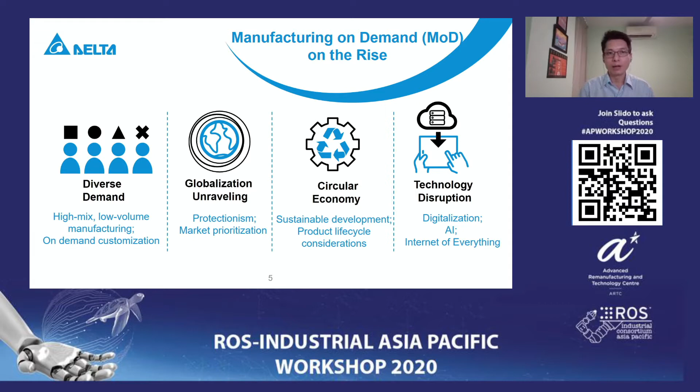Next slide. So first of all, let's take the conventional production line. When it's set up for automation, we see machines introduced in a well-designed manner based on the product. For example, manufacturing a single electronic device, like a mobile phone or laptop, involves multiple steps, perhaps 50 to 150 steps of processing.

So we have different types of machines put in place, and the whole production line, because to optimize production, we have to figure out the reconfiguration and the best optimized layout. When the whole line is set up, the cost will definitely be very high, because you also need to include calibration and maintenance.

And once the product is being produced, most of the time we do not touch the production line. But once we have a high variety of products being manufactured and the product life cycle is shortened, the production line needs to reconfigure or change quickly.

So over the whole life cycle of the machine, during line changeover, the method used is to move out machines that are not being used and add on or replace them with other machines. So machine or automation becomes even higher cost when we have a lot of line changing.

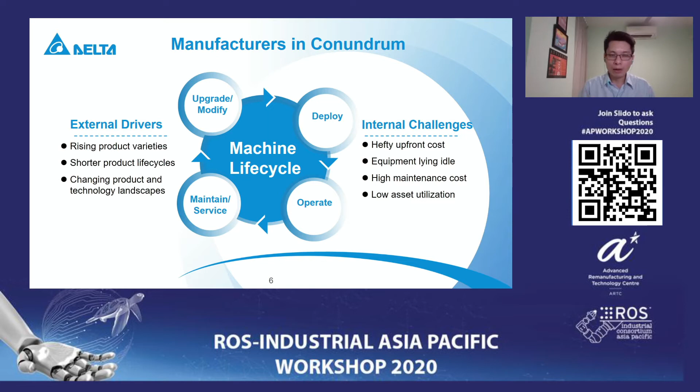So how do we do that? Here I'd like to share with you more about how we build up our transformable intelligent machine to address that. We started off with the electronic assembly process.

And once that's done, you also need soldering, which can be laser soldering or tip-based soldering. Once you complete the PCB board, you put it in a case—different types of cases—and that is the assembly process where you encase it, then glue it up by dispensing glue around it, encase it further, and then complete the screw driving process.

In between these steps, you also add automated optical inspection, AOI, for quality assurance—perhaps before or after insertion, or after soldering or after assembly—to make sure the quality is up to standard.

So for each product, the arrangement of these different types of machines will be different, because the design of the product varies—perhaps one has 6 screws to be driven in, another has 24. So how do you optimize the production line with different machines? For example, product A may need 5 screw driving steps and 2 laser soldering steps, but product B needs the opposite because of the different design.

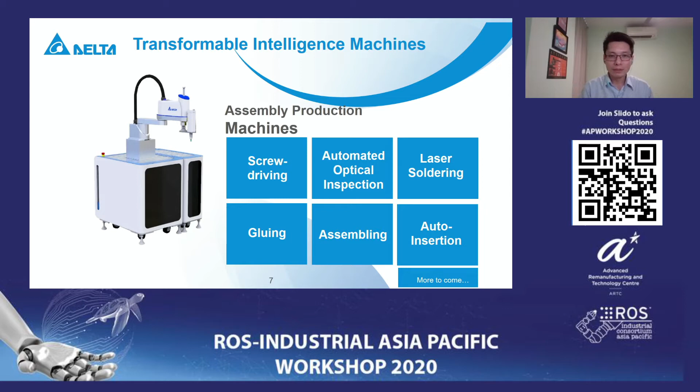But how do we have all these machines able to switch and change from one form to another? Let me share further with you.

Next slide. So the key component for this transformable intelligent machine is the intelligent part—the software, the programming, the data implementation—that helps us change the format of the machine as well as optimize performance, because you have data collected, you analyze it, and you know the best parameters to run for different products and processes.

And each part is modularized—the software and hardware components are modularized so the key system units can be reused across all the machines mentioned. We standardize all the interfaces between different components and parts so we can quickly mix, match, and fix them up, configure it, optimize it, and run it, so the changeover time will be very short.

So put together all this, what we do see next will be a TIM machine that has a modularized, standardized design, wanting to facilitate the changeover of new processes in the production line much faster. Here you see a photo of a screw driving machine, and it has all the key features needed for on-demand line reconstruction and construction, including all the related software.

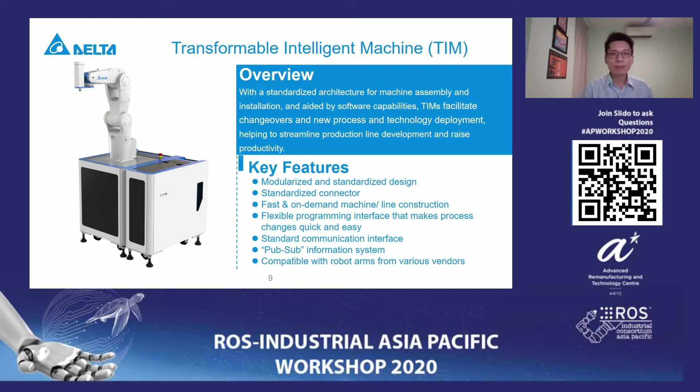So let me delve deeper into this. Let's go deeper in the next slide. So the key components of this will definitely break into three areas.

What you see in this first part is the robot arm. It can be an articulated robot arm or a SCARA robot arm, and it can be from different brands. The end effectors that we have established today are for electronic assembly, so you see screw driving, gluing, gripper, camera, laser soldering, along with this functional performance.

The second component is the common part that will be reused, being used as a standard frame and electrical control box. This will be a modular design, and moreover lightweight, to make the reconfigurable line change easy.

And we have the third component, which is the PC-based control system where we set up drag and drop graphic control, compatible with different robot controllers and end effectors. To set up the whole system, run it, and test it, we also have different types of data management, and it is evolvable, adding on along the way.

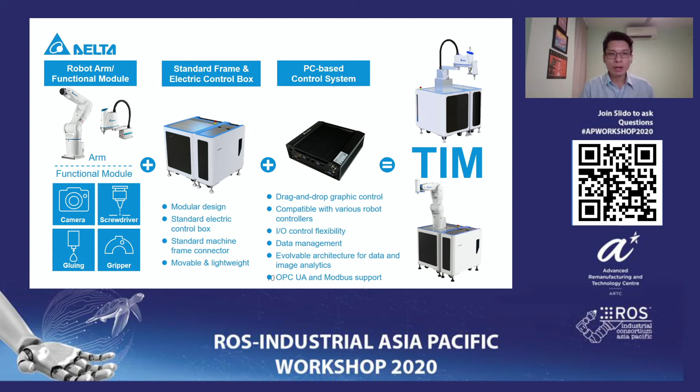So this is the idea of this TIM with these three major components. Let me go into a few examples of how we built it. Let's go into the next slide.

In terms of a screw driving TIM, the arm used here can be a SCARA or a 6-axis robot arm. Either one will be able to perform the function we need for screw driving. Depending on the product you want to manufacture, you might need the 6-axis because of different angles; otherwise, if it's from the top, you will use the SCARA.

The screw driving module end effector is the Delta product. We have the standardized frame and e-box that we use, and we put in the camera and PC control system. Once it is set up, the whole TIM will function as a screw driving machine.

And when we do need an automated optical inspection machine, we can use the common parts of this to transform it to the other function. So, next slide.

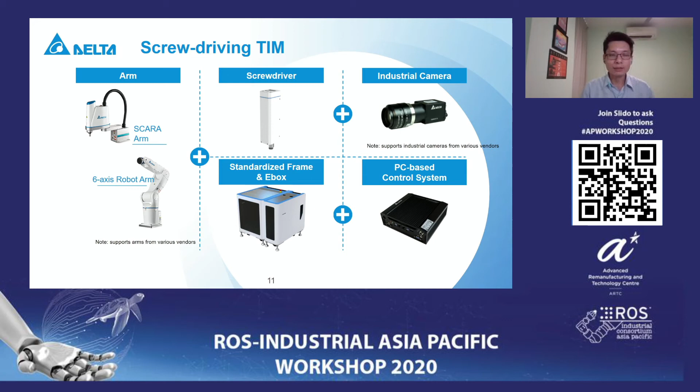Keeping the robot arm, standardized frame and e-box, and PC-based control system, the additional replacement is that the end effector, screw driving, will be changed to the optical module industrial camera. So physically, you only need to change the end effector for the function, not the whole system level.

Also, a lot of integration of the full system is done by system integrators, and to guarantee full functionality and performance, many times a replacement or change of the end effector is not encouraged. Even where this is done, it takes a longer time to tune and reprogram. However, using our method here, we can change it much faster, as well as deploy new intelligent modules.

So for the AOI, we also have the DIVA module, which is a Delta Intelligent Video Analytics module, based on deep learning. It can perform auto defect classification for various electronic products. Moving forward, it can be trained and used for other types of products as well.

If you are keen to look at it, the machine learning AI component implemented in the machine itself enables this fast changing of the module with the programming and intelligence needed. In other words, a screwdriving machine can be transformed into an AOI machine, with both the physical side and the programming and intelligence being done rapidly. Okay, so next slide.

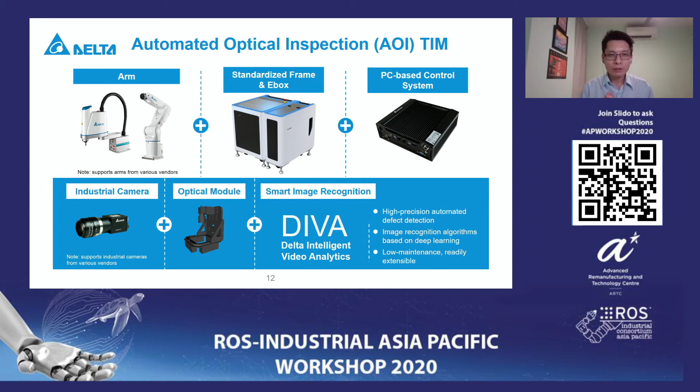So what we expect by doing this is to make the reconfigurability of machines in the production line agile, with fast changeover, and to lower the technical barrier. As I mentioned, the programming is usually done by system integrators, but with our platform there will be a library made available, and we also welcome system integrators to add library component modules, which we can share with one another.

And also for the third part of it, not only from a single machine, because the utilization for different types of processing will be shared out, the data collected allows us to perform analytics at the system level, and extracting it up at the production line level, making full production line analytics that are able to optimize for quality and productivity. So this is the expected benefit of using the Transformable intelligent machine.

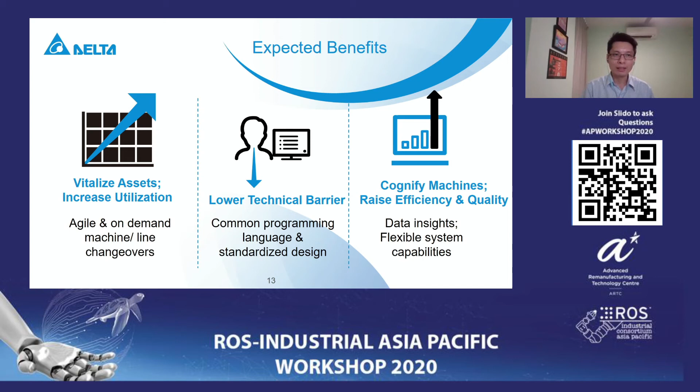One of the focus parts we are looking at is the standard machine frame. Within this, we are also very thankful for ROS, which we use in this control system and add on some functionality. Moving forward, we also welcome different partners to expand the multi-brand compatibility, so we can interface with different brands, whether it's the end effector or other types of robot arms.

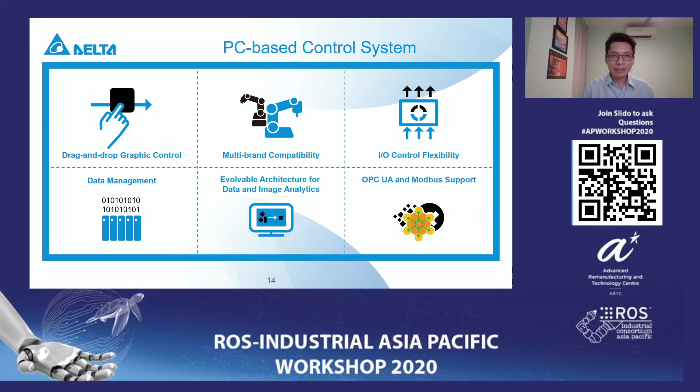So with all these, we are expecting evolvable models of the data and other types of analytics. Here we've mentioned more on the image side. So, the standard machine frame - next slide.

We are open to partners who are keen to utilize the standardized machine frame to speed up and allow reconfigurability. This standard machine frame, with the one connector we provide, makes it easy to connect machine to machine, between machines or inside one machine. The one connector provides not only the power line, but the comms line, air and vacuum - all necessary connections - standardizing it and making sure it easily interfaces with one another. So with this standard machine frame, robot machine frame and functional machine frame, it becomes the base.

You can use it with the programming inside the PC control box, put in different robot arms and end effectors, perhaps to look into different applications in other segments, not only electronic assembly. So this is one we welcome partners to discuss with us.

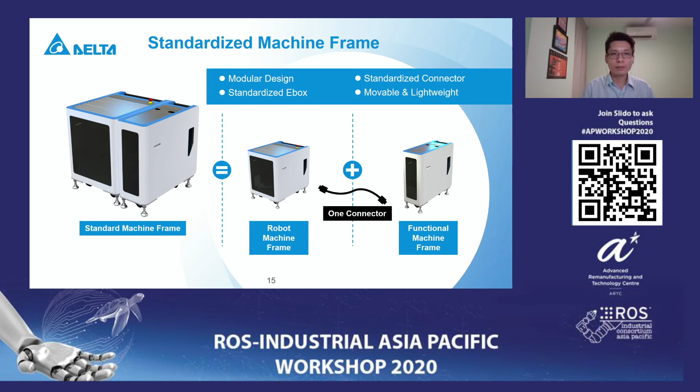Moving forward, we also have in progress work using ROS support to build different types of functions, from digital twin simulation, big data analytics, machine vision, to safety purposes. All of these are currently made available in some of our beta versions.

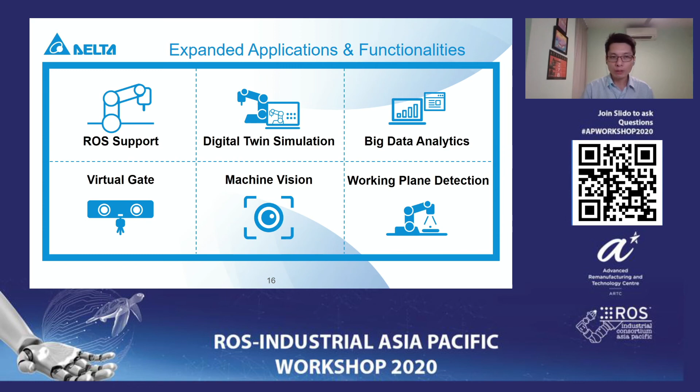I'd like to also go quickly into a very important part: material transportation. As we know, production lines can change over, but at the same time material movement in the line today is based on conveyor belts, which are fixed or tightly coupled. We also make available a modularized conveyor, but I will skip to the part we are emphasizing today: the autonomous mobile robot.

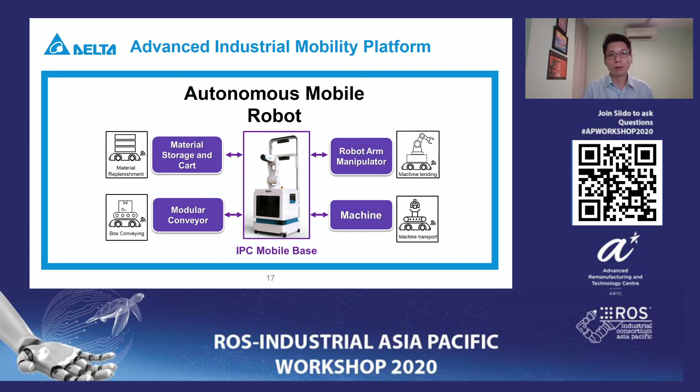For this autonomous mobile robot, similar concepts are being implemented - it has all the components able to be fixed up for different usage. You have the AGV as the base, you have the machine frame, you have the robot arm. Depending on your need, we can mix and match, deploy quickly, and reduce training and operation costs. You can use it for not only manufacturing, but healthcare, hospitality - depending on the need. We are in pilot runs to try out different segments as well.

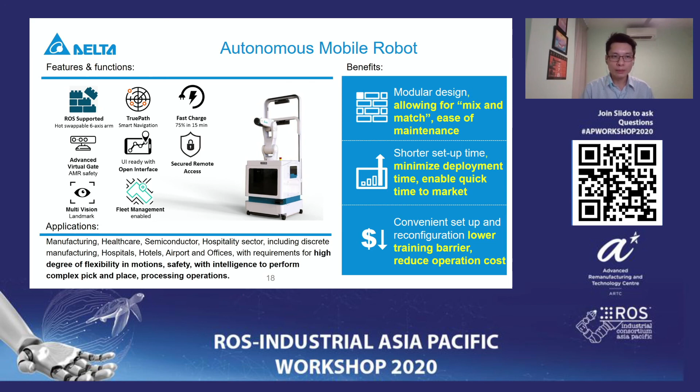Putting this together, we understand that the whole material and logistics solution will be a very important topic in manufacturing - intra-logistics, how material movement is carried out. Just implementing an AGV or AMR will not solve the problem; you need to look at it at a system level optimization. So we look at the whole consultancy, scoping out areas where the whole implementation is able to resolve and optimize the performance of material movement in the factory. So what we offer is the end-to-end solution here for the autonomous mobile robot and material transport.

Let me conclude with a quick summary. In order to achieve this reconfigurable production line, we have built a Transformable intelligent machine, and we welcome partners to talk to us, to discuss joining us in this work - from electronic assembly process, different functions of TIM machines, and AMR - we can make the production line flexible and reconfigurable. All right, thank you very much.